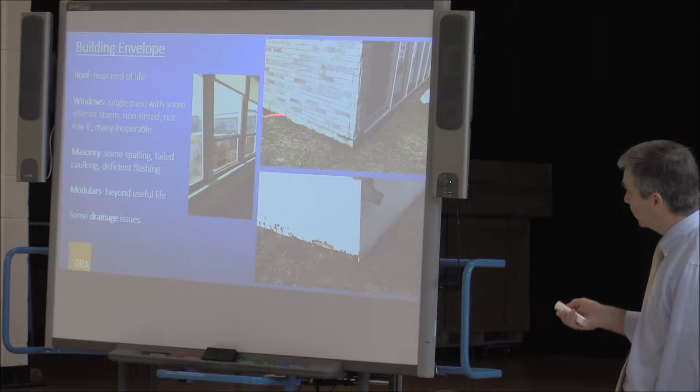The building is approaching 60 years old. It's lacking in modern kinds of systems. A lot of those materials are still original. The windows—they've tried to add storm windows, but there are still single pane windows in places, very leaky from an energy point of view, unfortunately. And some of those other issues you can see there.

Likewise, on the interior, there's some materials that are deficient: ceilings, floor tiles, the auditorium seats—some of them have been refurbished, a lot of them haven't. There are accessibility issues, even though it's a one-story building. There are some different levels, like a stage where they've sort of makeshift got some access there. It's really not fully compliant. Some changes in grade in the corridors, stairs, and so forth would need to be addressed in a renovation.

And there are still some asbestos tiles and other materials that would need to come out in a renovation scenario. They're not hazardous in the sense that students are exposed to them, but in a renovation project, they would need to come out.

This also summarizes the state of mechanical and electrical systems—a lot of them are at the end of their useful life. Some parts have been replaced. It's getting harder and harder to find parts for some of these things. Again, if we were to do a renovation, or even if we weren't, the district is going to have some repairs and improvements that are going to be needed in the coming years.

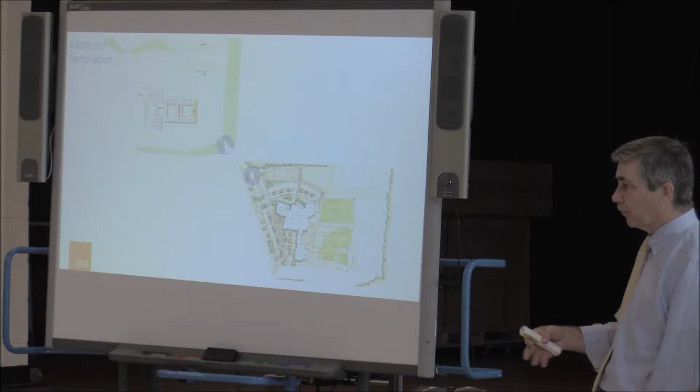In this option, the site layout and configuration changes very little — there's still a drop-off in front of the parking area, and the athletic fields remain more or less in the same place. So those are the 2 addition/renovation options we're carrying forward, and there are plans of them on these tables you can look at closer when we get to that point.

Just to walk you through briefly, this is the one that adds a piece at the end, completing the corridors so there are no longer dead-end corridors. In that new construction there would be some classrooms, a science lab, some small spaces, and open collaborative spaces. So you can start to see we're trying to develop those classroom clusters while still retaining and respecting the layout of the existing building.

So the corridors are still there, and in some cases some classrooms are still there, but you'll see there's more variety of spaces now, and some classrooms are even taken away here, opening up those collaborative areas.

And we've also distributed the science labs. So there's one here, two of them here, one over here, so that it maps that education plan onto the existing building. The other thing to note is that all the core spaces, the gym, the cafeteria, the auditorium, the library, which becomes the learning home, all remain in their same locations.

And they would get renovated during the summers, hopefully as much as possible, so that during the school year the students are not lacking in those areas. But to build this, you can imagine it's going to take some phasing.

Some breaking it into smaller pieces, because yes, a contractor could build this new space while the existing school stays in operation. We put some barriers up here at the end of the corridors. We have to come up with some alternative egress temporarily, but this new space, for the most part, could be built. We'd have to come up with site access to get back there.

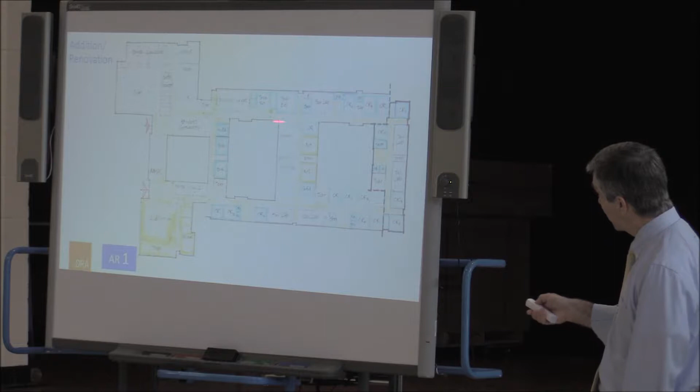And the students could be on this side of the building, the contractor could be on that side doing renovation, and so forth. So there might be one piece here, another piece here, another piece here, and then some summer work. We estimate that it would take in the vicinity of three years or so to do that kind of renovation project, while the school is occupied.

But as I said, the site plan wouldn't change. This is a three-dimensional view of what it looks like.

The other option is the one that saves only the gym and locker room at this end, auditorium and music rooms at this end. It proposes converting the administration into art rooms. So now you sort of have art and music together here, and then building all new academic spaces and administration and new entrance wrapping around the existing gym here.

Again, the notion would be that this construction would happen while the entire existing school stays in operation. We'd have to come up with some temporary measures, some temporary parking. The drop-off could still remain in front, but we're imposing on the existing parking. The baseball field would be out of commission here, or partially under that here.

But once this is built, then the school could move over and occupy that, and then demolition would happen back here. And again, it'd be safely segregated from the building and blocked off, but we'd have to create access to allow the contractor to get back there, because the building couldn't be demolished just during the summer. Some of it would spill into the school year.

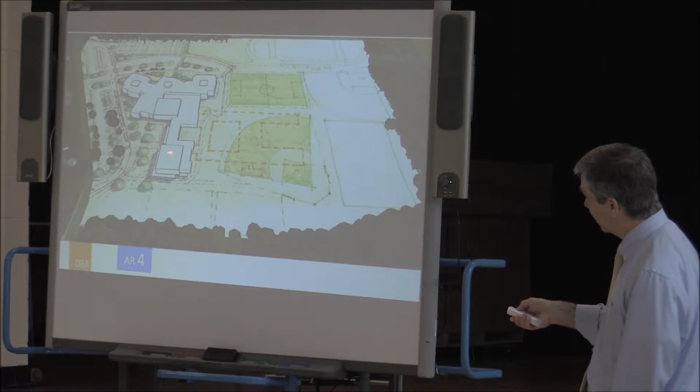I should point out too, this anticipates a two-story addition here, so that these are four classroom pods, two stacked on top of two. That's what it would look like three-dimensionally. So you can see there are two stories there. That's the gym, that's the auditorium. This is all one story here. So yes, there would be an elevator in there, there would be stairs, it would be fully accessible now.

And we looked at new construction options. We wanted to utilize that same philosophy of finding locations where construction could be happening while the existing school stays in operation. So we identified originally six locations where that might be possible. If you look at the size of that footprint, you can see that these rectangles don't in and of themselves represent quite a full building necessarily, but they're generally zones.

A zone in front of the building, where the parking lot is, where the baseball field is, adjacent to the building, where the football field is, where the soccer field is. Those are sort of the open areas on campus.

By the way, we can't build here because we're too close to the river, and there are now environmental guidelines. That red line isn't literally no-build, but it's kind of no-disturb. And right here, about 100 feet in, is truly no-build, no-disturb at all. So we can't build on that side of the existing building.

So we came up with not just 6 alternatives, but some variations, adding up to 9 possible solutions. Number 1 relates to site location number 1, number 6 is site location number 6. But there are some A's and B's in there too, that's why we got to 9.

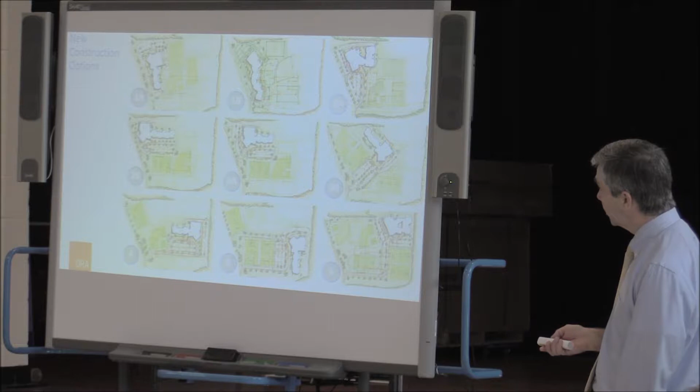After our preliminary evaluation, we thought 3 showed the most promise, satisfying the education plan and site utilization goals while being least disruptive. In the case of locations 4, 5, and 6 toward the back of the site, those were not advantageous environmentally at all—the land is low and wet, there are wetlands back there, it would be difficult to build, with long driveways and long utility runs. So those fell to the wayside in our preliminary analysis.

These are the 3 we'd like to concentrate on, although we did come up with a variation of one of them. They're very similar in site plan, so we call it 2A and 2A.1. So there's really 4 new options here plus 2 renovation options—you might say 6 options still on the table that we'd like feedback on tonight.

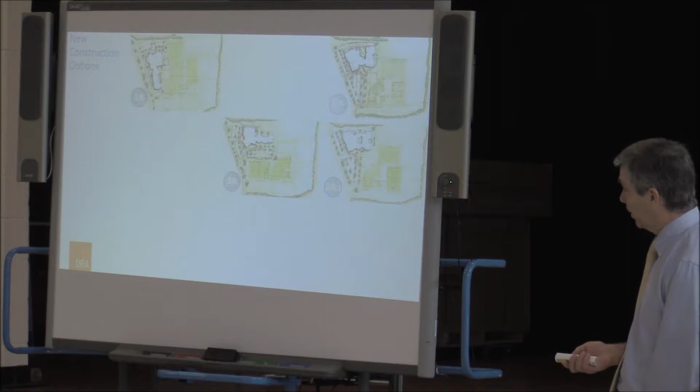Just to quickly share them with you—they're on the plans on these tables so you can see them. Location number 1 envisions a linear building that fits in front of the school, sort of where the drop-off area is now. It's a large green space. It would eliminate some trees under there, but here's the road.

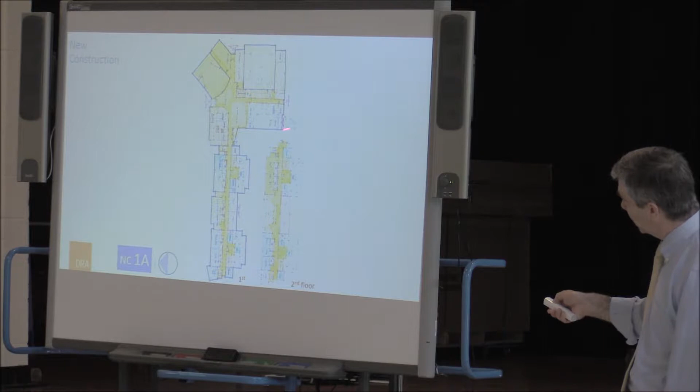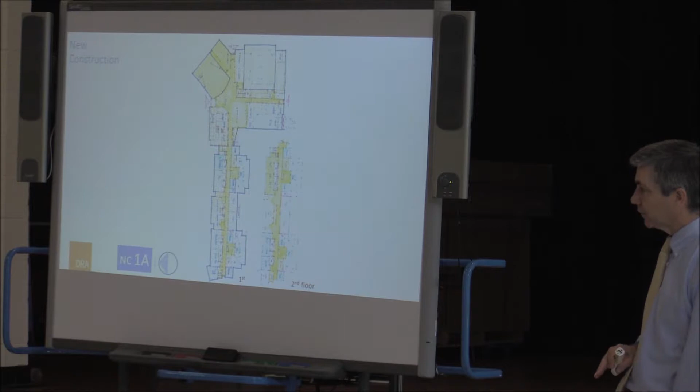The road's here. The notion is that this is the academic portion of the building, on 2 stories, and this is the public portion. The floor plan looks like that—these are the classroom clusters, with the learning commons in the middle, and the public areas at one end: auditorium, music room, gym, locker rooms, cafeteria, commons area, kitchen, and the administration area and student services, with the main entrance adjacent to that. There's a secondary entrance too, so there's good access both day-to-day for students and in the evening for community events. Three-dimensionally, that's what it would look like.

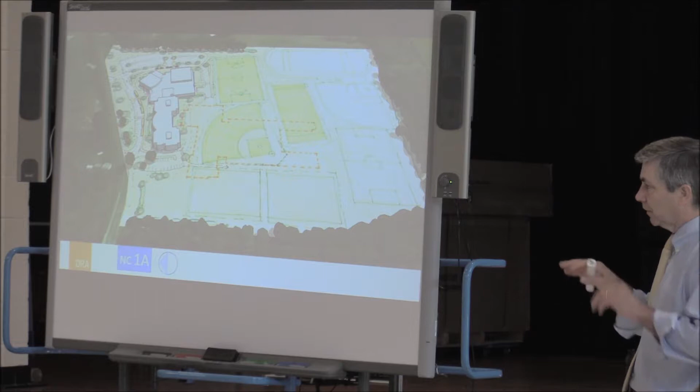The options still alive in this discussion are all 2-story options, for a lot of reasons that make the most sense. It addresses the education plan well, keeps the school compact, gives it that small-school feel because it's more compact and not as spread out. It's more efficient in utilizing the site, so in all these new construction options we actually gain green space—more than there is now for athletic fields. And it's more economical in terms of construction, stacking what are in essence nearly identical floor plans of the academic areas.

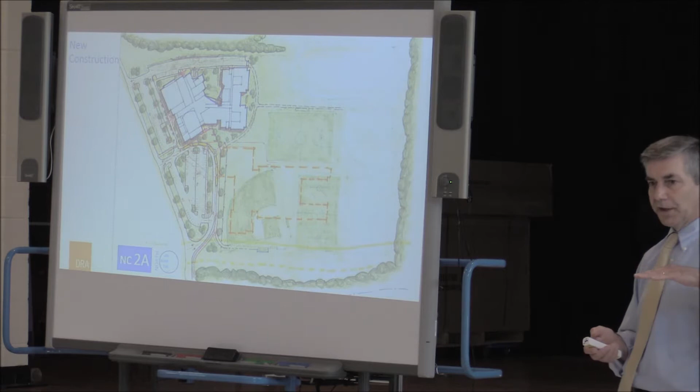The second option locates the building primarily on the parking lot and somewhat on the current baseball field. It's the same components, just oriented differently. I should point out north is to the left, which is important because for schools it's favorable to orient classrooms to the south to get natural light, passive heat gains at certain times of year, and it's easier to control glare. So in both these first 2 options, the classroom wing is oriented with the major corridor running east-west, so classrooms are on the north or south side—a principle we strive for.

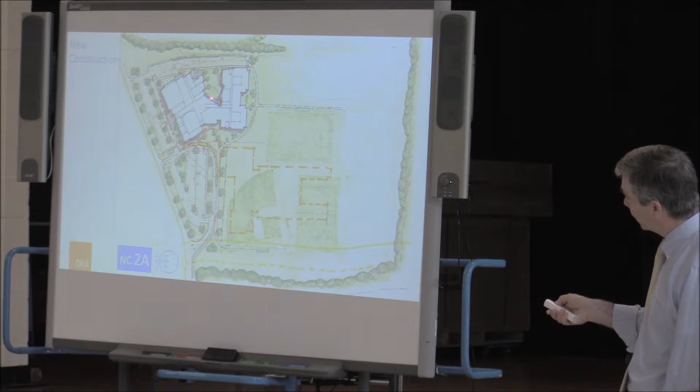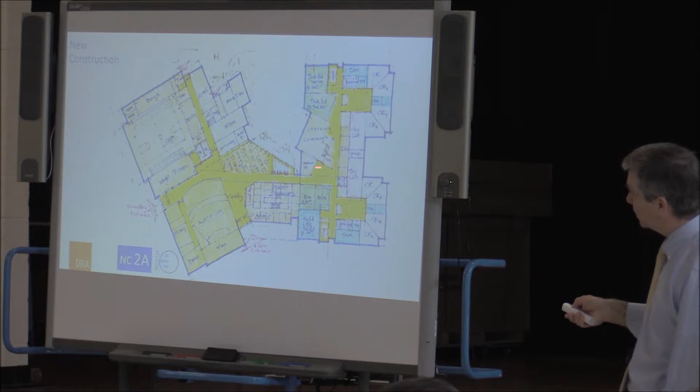This is again a 2-story classroom wing, forming an open courtyard. The plan works like that, with classroom clusters around open space. Science labs are distributed again, and the learning commons is in the middle of the building, with the larger public spaces on this side along with the main entrance—very similar adjacencies to the other plan. It's just not a linear arrangement; it becomes a T-shaped circulation pattern with classroom clusters at each end.

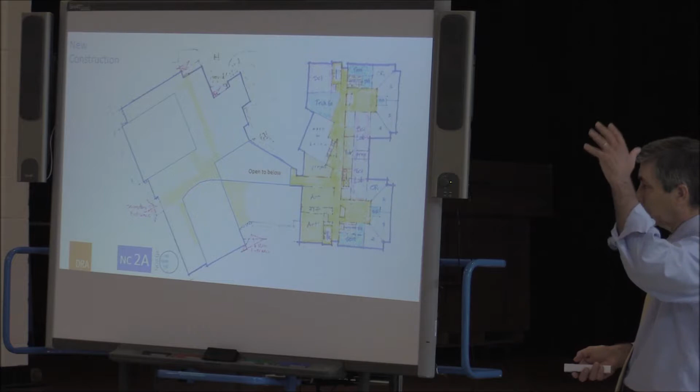And there's a second floor that, as I say, is nearly identical. The rest of the building is all one story, but some of those volumes are high. The gym is obviously a high space, the auditorium is a high space, even where the cafeteria commons is, this room here, it deserves a high space too. And there's what it would look like three-dimensionally.

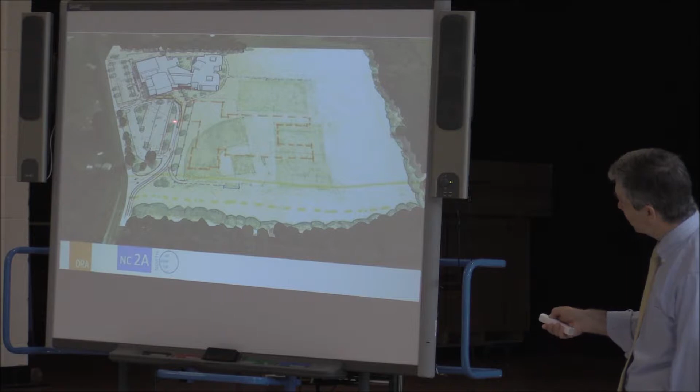The approach would still be this drop-off, almost identical to where the drop-off is today. If you look at the orange outline, the ghost of the school is right there. The drop-off, in this case, instead of entering the existing building, is focused on the new entrance right there.

So that's kind of how this building was positioned. And this angle comes up because it's parallel to the existing road, the most efficient use of the site there. So we get about half the parking in front of the school, the other half kind of wraps around the school.

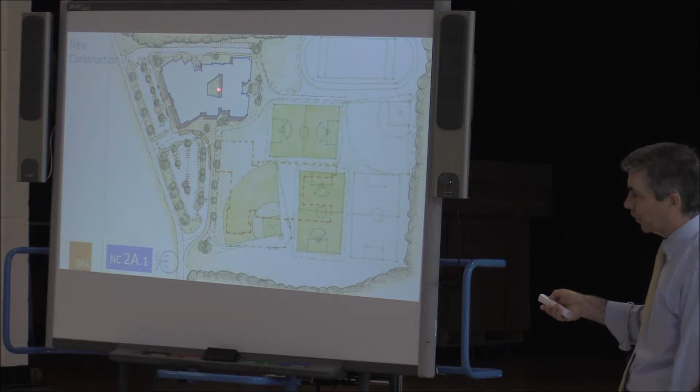And then the variation on this, you might see, just creates an enclosed courtyard. It's virtually the same site plan. We've just manipulated the floor plan a little bit so that now the flow is circular, around the interior courtyard here. Otherwise, it's virtually the same as option 2A for the second floor. And there's what it looks like three-dimensionally.

And then the third option is in somewhat the same general location. This one's more on the baseball field, location number 3, so it's option 3A. But here the academic wing is oriented north-south, so the classrooms are facing east and west. It's a little bit of a disadvantage to this option. It does fit the site a little easier. We're not quite as tight up here to the existing property line. But there are some other issues.

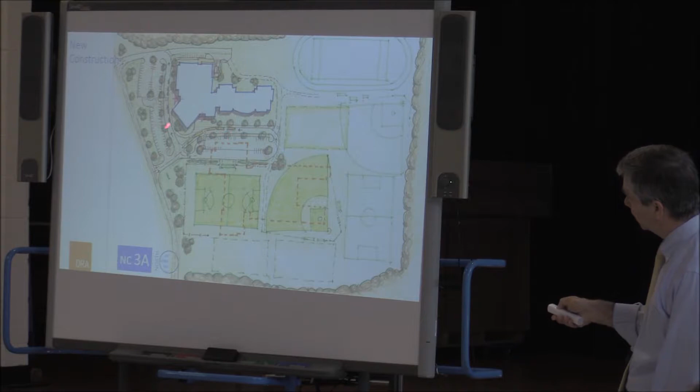Also, in this case, during construction, you can imagine we're on top of the existing parking lot. We need to create some temporary parking. We would end up building some temporary parking in front of the school, maybe to the side of the school. Ultimately, that gets replaced or thrown away in a sense. And when the building comes down, where you saw the orange, then we could build the permanent parking in front of the school. So the site plan is a little bit different than the other one, where there's a bus loop here and a car and parking area on this side.

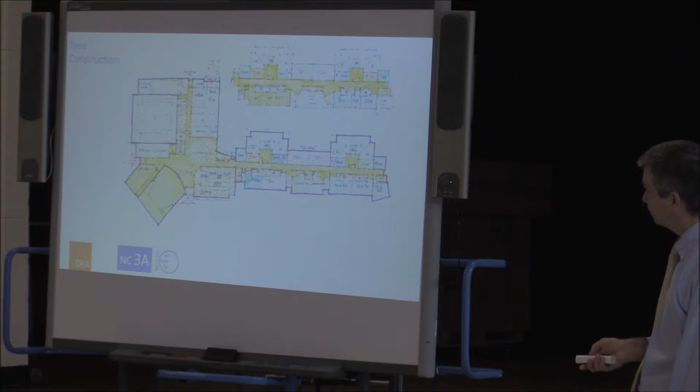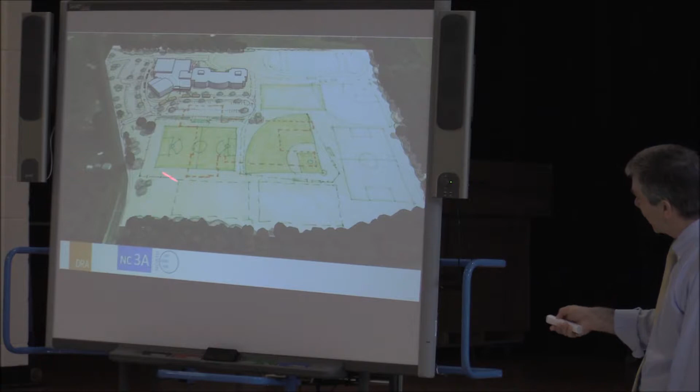So those are the extent of the options. The site plan is identical, the floor plan is identical to option number 1 here, with a linear corridor. Fairly straightforward plan. The second floor stacks right over the first floor. And that's what it would look like three-dimensionally. So here you get playing fields coming right up to the existing road almost. But again, the amount of green space in all these new options is roughly comparable, and the number and types of fields are roughly comparable.